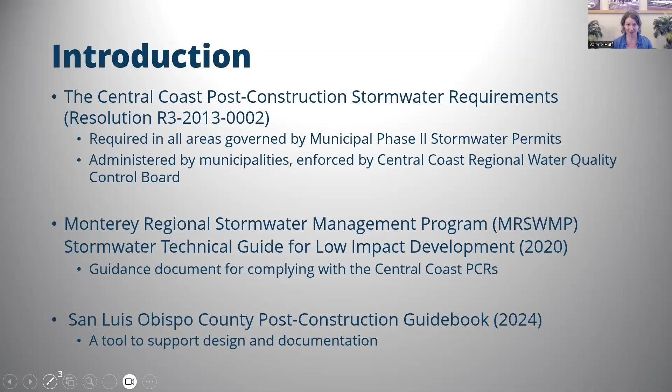Also just talking about the hierarchy of how the PCRs are implemented through our region. So the regional board developed the PCRs, but then they delegate the implementation of those PCRs to the municipalities. So it's up to the municipalities to confirm that all of the projects that are developed in their area conform to the PCRs. And so municipalities have developed varying guidebooks as a means of just helping with the implementation and giving some guidance to the development community, who is then going out and designing and constructing stormwater features.

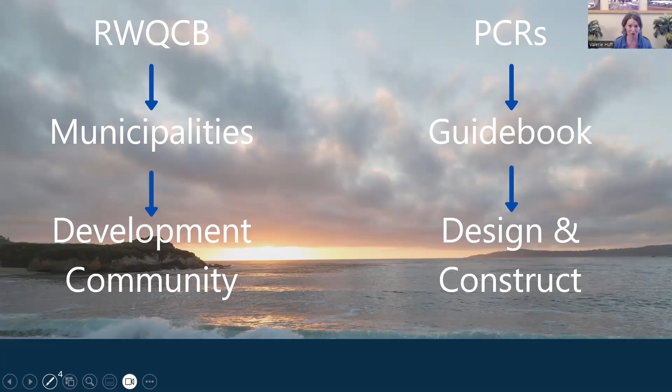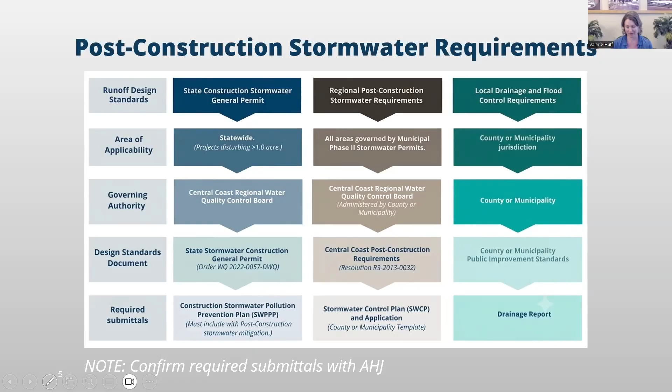Now we'll do a brief overview of the performance requirements within the post-construction requirements. There are 4 different tiers of performance requirements within the PCRs, and they are dependent on the amount of new and replaced impervious square footage you are developing on your project site. For many of you, this may be information you've worked with over the past 13 plus years of implementation, so I'll go through this briefly. If you have questions, I'll get back to them towards the end.

Tier 1 is site design runoff reduction. Tier 2 is water quality treatment. Tier 3 is retention, and Tier 4 is peak flow management.

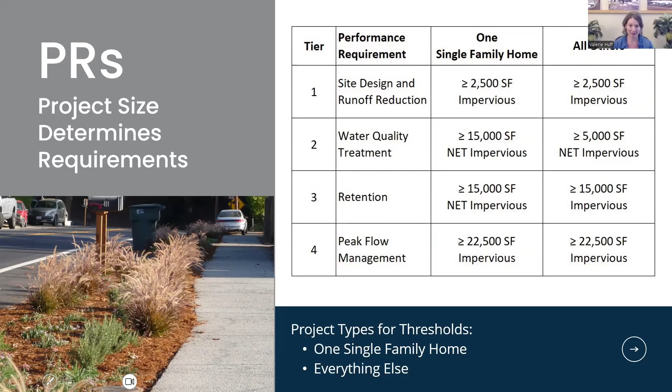For the purpose of thresholds for PCRs, where you fall in these categories, there are 2 different classifications defined in the PCRs. One is a single family home, meaning 1 single family residence, and everything else falls into the second category. The intention is that the regional board wanted to capture anything considered a common plan of development—meaning if you are constructing 3 or 4 single family homes under a single construction permit, that would fall under the everything else category, while 1 single family home is very literally 1 home.

An overview of the typical submittals for post-construction requirements—these submittals may vary depending on the complexity of your project and where you fall within the planning and permitting process. A typical project would start with a preliminary stormwater control plan, which may be where you're applying for a land use permit. Here you just need to show conceptually that you can achieve compliance on your project site.

As you move into final engineering design and construction documents, that's when you would prepare a final stormwater control plan. You may also be required to submit a drainage report and typically a geotech report to support that stormwater design. Here you would also be drafting an operations and maintenance plan, then moving into construction, where as engineer of record you have specific inspections to document that construction. Following construction, you would finalize your O&M plan based on record drawings, and then finalize a maintenance agreement for the maintenance of your stormwater control measures in perpetuity.

One thing I want to mention for this slide, and really everything I'm describing here, is that you want to confirm submittals with the specific permitting authority you're working within. So check with your municipality to confirm what they're expecting so that you are submitting what is required for your project.

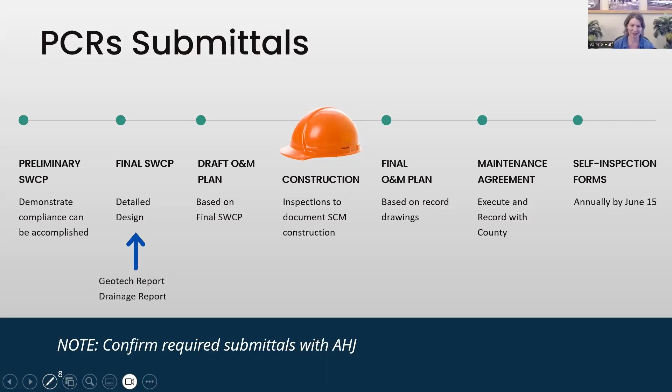Next, I'm going to walk through a few specific references in the guidebook that apply to various performance requirements. Again, these are all regulations that come directly from the PCRs. These have not changed, but the intention of the guidebook was to provide clarity and resources on how you could respond to these requirements.

One of those is source control BMPs, and the PCRs require that your stormwater control plan outline the source control BMPs for all projects that are PR2 and above. There are various types of source control BMPs—they can be structural, such as covering for a trash area, or operational, meaning street sweeping or providing training for staff.

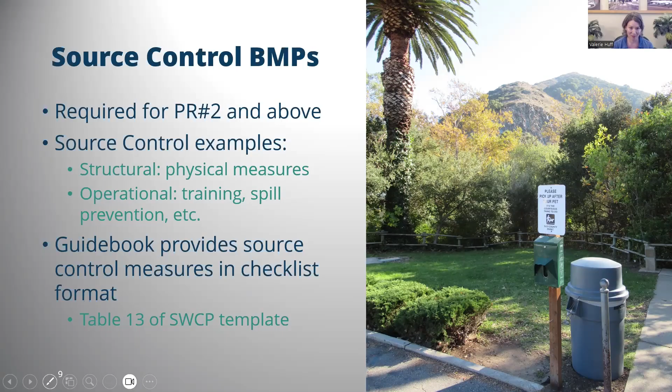What the guidebook does, and also what the MRSWMP technical guide does, is provide these source control BMPs in a checklist format. The intention is that for most projects, any of the BMPs you will need are provided in a template and a table, and then it's up to you as the applicant to go through and edit that table to confirm you're covering everything applicable to your project.

Moving on to opportunities and constraints. The PCRs explicitly require that all projects PR3 and above prepare what is called an opportunities and constraints analysis. The intention here is to look at different features and characteristics of your site and identify where you could integrate passive stormwater measures into your site design.

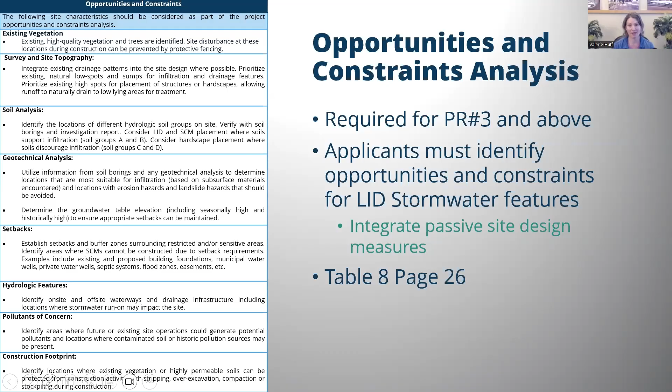The PCRs are very prescriptive in terms of what needs to be required, and this is an area where we've seen applicants provide varying levels of detail looking at all these different criteria. So what the guidebook does is streamline all of this into a single section, and it contains a checklist that includes all of the opportunities and constraints required by the PCRs. This is now integrated into the SLO County Stormwater Control Plan template.

The intention is that you're covering all the categories in a checklist format. So rather than having to develop this information for each project, you can go through and check the boxes that are applicable, and then add descriptions to better describe your project or justify why they are not applicable.

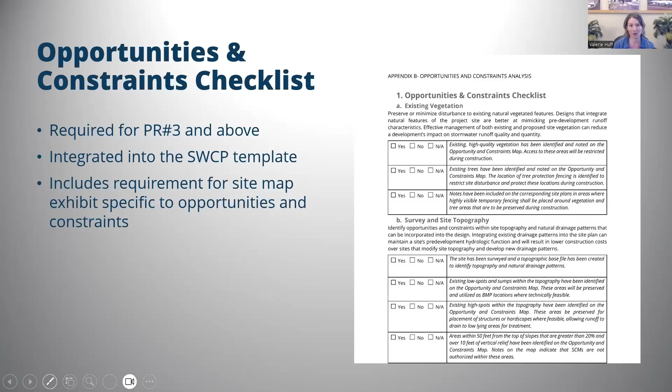The guidebook also contains guidance on drainage management areas, and this has been a bit of a gray area in terms of PCR compliance. What is exactly a DMA relative to a watershed or a subwatershed? This guidance and table in the guidebook came from guidance published by the regional board subsequent to the PCRs, and also from project experience seeing the types of projects coming through the county over the past 10 years.

One thing I haven't noted is that on each of these slides, these are little snips from the guidebook. I'm not intending that we go through each of these in detail for the sake of time, but I am identifying on the slides where you can find this information in the guidebook. The intention is to plant the seed that this is a reference you can go back to and find this information in more detail if it's applicable to your project.

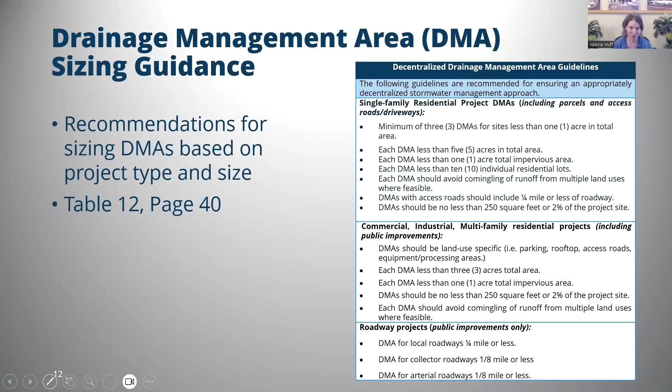Wrapping up the performance requirements, a reminder that if you have local flood control requirements that apply to your project, you typically will need to prepare a separate drainage report. Often what we see is a drainage report combined with a stormwater control plan, and in that case it can be really challenging for the municipality to confirm that you've met all the requirements of the PCRs.

A reminder that the regional board implemented delegated implementation of the PCRs to the municipalities, and it's up to them to confirm that you have met all of these requirements. So for the sake of showing compliance with PCRs, it's more straightforward if you can break out flood control into a separate drainage report, and often that is what will be required by the permitting agency.

So for PR3 and above, PR4 and above, typically what you need to do is document compliance with PR4, which is the 2 through 10-year storm, in your stormwater control plan. Then if you need to manage, say, the 25, 50, or 100-year storm, that would be documented in a separate drainage report.

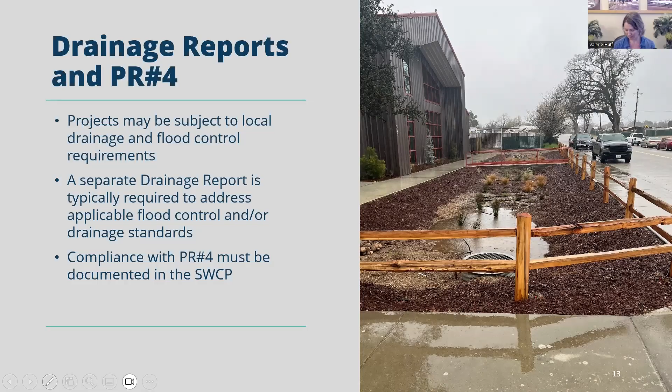Now we're going to jump into discussion of pervious surfaces and runoff coefficients. From my perspective as a designer, this has been one of the more challenging aspects of compliance with the PCRs. What is in the PCRs is an equation to calculate what's called a runoff coefficient, and this is different than other coefficients we'd use in hydrology, such as a rational C or a curve number. This runoff coefficient is specific for small storms and is based on the percent impervious of your project site.

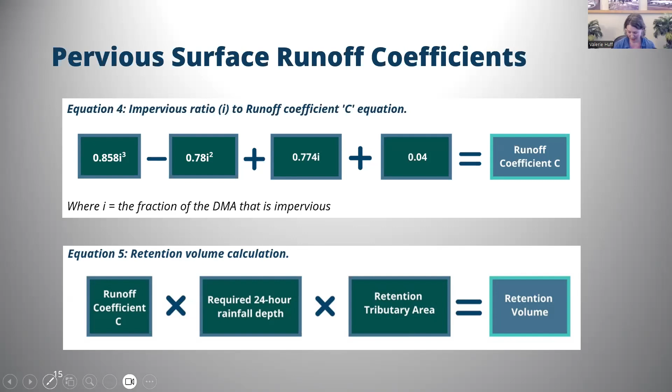It's a fairly straightforward equation. What becomes more challenging is understanding what is considered impervious and what is not, and if you have a surface that is maybe semi-pervious, not a lawn but not a parking lot, what is it? This runoff coefficient C is then used to calculate your retention volume, so it's a direct input to how you will comply with PR2 or PR3. What the guidebook now includes is recommendations for C values, runoff coefficient values, for commonly used surfaces.

The intention is that in lieu of calculating a C value based on percent impervious for these types of surfaces, you can use this C value directly from the table. This table was prepared to clarify what the County of San Luis Obispo specifically identifies as impervious surfaces, and what they would expect a reasonable coefficient to be for something semi-pervious, such as a DG walkway.

There's a couple sections I want to point out in this table, specifically a big change currently within San Luis Obispo County: Class 2 ag base is now considered an impervious surface. This is based on direct feedback from the regional board as they reviewed this guidebook, and also on the direction the State Water Board is taking statewide in classifying gravel surfaces.

So this classification applies to any type of gravel surface that is dense graded. From a stormwater perspective, we are breaking out two general types of rock: dense graded versus open graded. Dense graded means you have a wide range of rock sizes within your mix, so when compacting that gravel, the smaller rocks fill in the voids and you end up with a fairly dense structural section with a low void ratio.

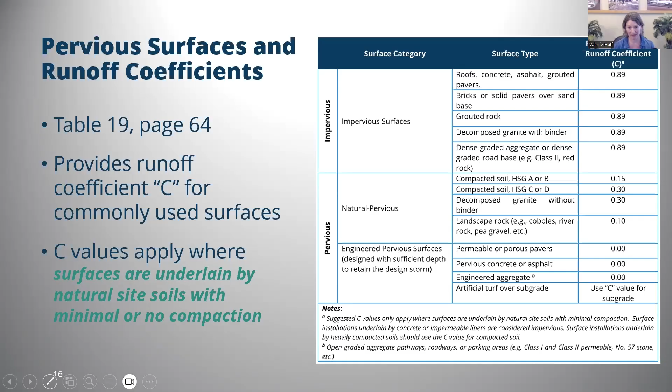Looking more closely at the table, there's a category we've classified as engineered pervious surfaces. The intention here is that these surfaces are designed specifically to retain your storm, whether that be the 85th or 95th percentile storm. These surfaces have a corresponding runoff coefficient of 0, meaning for those design storms you would expect 0 runoff. The important thing to understand is that if your rainfall depth, say, is 2 inches, you have enough pore space within that depth of aggregate to hold that 2 inches of rain.

Another challenging factor I wanted to point out is that the PCRs contain a table of correction factors, which I believe are in Attachment E. They're in the SLO County Guidebook in Table 11. These correction factors are meant to be used for alternative compliance only. They are not intended for use in calculating runoff volumes.

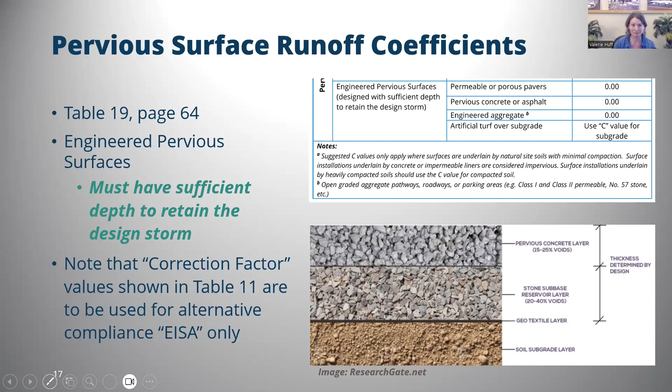I also wanted to point out that in San Luis Obispo County specifically, with these surfaces—dense graded aggregate, decomposed granite with a binder—counting as impervious surfaces for the runoff coefficient, they also now count towards the impervious surface for your PR threshold. So if you have a long Class 2 base driveway, that could now push you into a higher PR threshold.

Of importance, again, this is specific to SLO County—check with your local jurisdiction to see how they are categorizing gravel. If you have an existing Class 2 driveway or other parking area on your project, that's now considered an existing impervious surface. So it's categorized as impervious for both existing and proposed conditions.

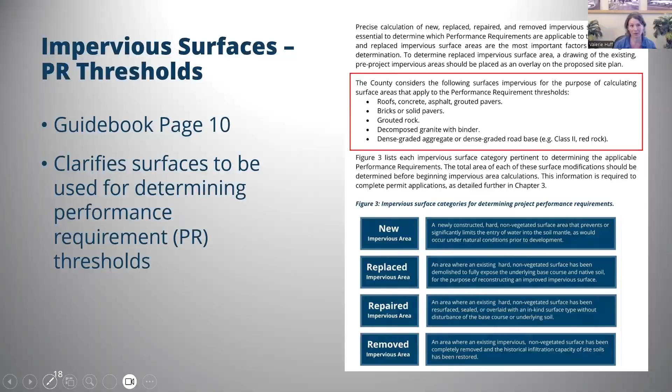Next, we're going to jump into a description of some common stormwater control measures. One of the primary things Anne really wanted to do in the guidebook was provide clarity on stormwater control measure types, because through the past 10 plus years of implementation, we've seen a lot of varying nomenclature in how stormwater control measures are described.

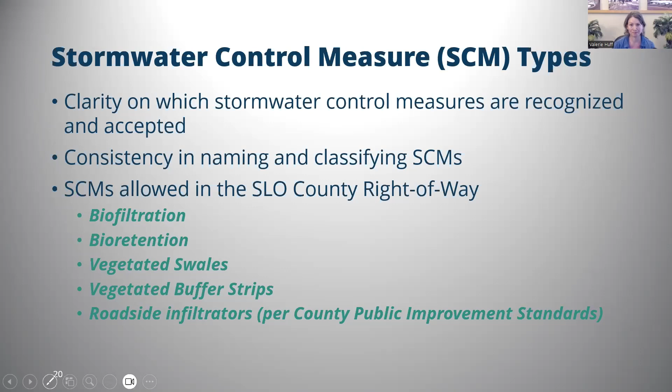What the guidebook does is provide a detailed table of really every single type of stormwater control measure that hopefully you would need to include within your project. There may be very specialized cases where something doesn't fit within these categories, but the intention is that these categories are specific, but broad enough to capture generally all types of stormwater control measures. So there's a very specific name, and the intention is if you're designing one of these features, you're using the name that's shown in the table.

There's a description of what these features would include, and there's also a column that shows which performance requirements are applicable for different types of stormwater measures. The intention is that anybody plan checking your stormwater control plan or construction documents can see this nomenclature on your plans and in your report and confirm the type of facility that it is, and also the type of operations and maintenance that will be required.

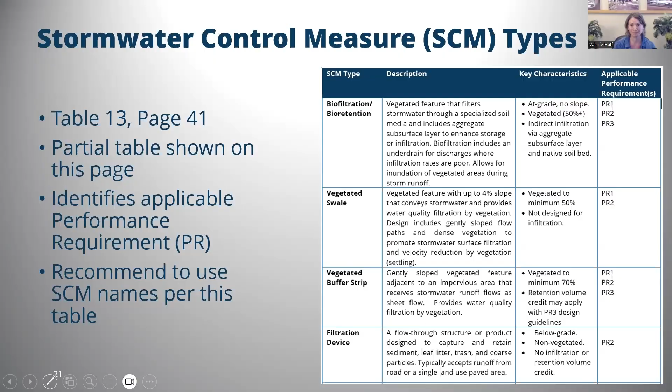This is just an example of two constructed stormwater control measures in our county that had varying names assigned to them that maybe weren't very clear in terms of their intention. We've seen kind of a mishmash of names, like a bioretention swale or maybe a bio basin, whereas the intention with the naming is that it will be consistent with what you see in the built environment. So visually, you can expect what the facility might look like based on the name.

That also clarifies the long-term operations and maintenance requirements, so that if a county inspector or the engineer needs to do a follow-up, they can look at the name of the feature and know: yes, this is a bioretention basin, it should have a flat bottom, it should have these other features, and these are the things you need to do to maintain it. So the intention is not just to facilitate plan review and permitting, but also to carry these projects through that O&M phase in perpetuity.

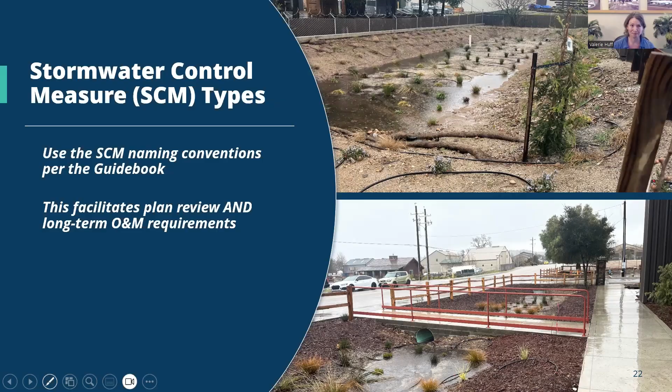Again, these are recommended minimum requirements. There may be specific reasons why on your project site you would want to have a larger setback, or you may be requesting a variation. These setbacks are required in San Luis Obispo County; they may vary within other regions. There's two types of stormwater control measures that I'm going to speak to very specifically, and the first are vegetated swales.

I'm bringing up swales because what we've seen in implementation is that oftentimes designers try to use swales as double duty with bioretention. What's been done in the past is that bioretention media has been used in the flow line of a swale. A swale by nature is designed to convey runoff, taking it from one part of your site to another, and that runoff is concentrated, meaning it's all within the shape of your swale—whether it's a V swale or a trapezoid, it's all within the footprint of your swale, and it's concentrated flow. Bioretention media was not intended for use in that type of facility because it's highly susceptible to erosion.

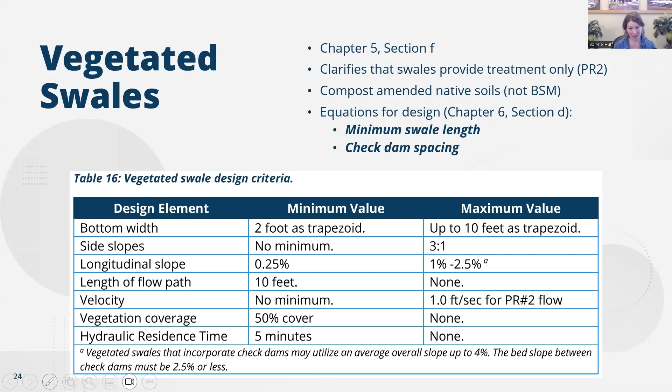Here are some graphics of swales around the county. Of note is that swales, in order to provide treatment, require a minimum coverage of 50% vegetation. It's the contact time with vegetation that provides treatment as water flows through these swales, so as a designer it's something to consider. It looks like the swale on the top left needed closer plant spacing to achieve that 50%. Cobbles can certainly be used within the flow line of a swale, but you need to be creative with planting around those cobbles so you're achieving that 50% vegetated coverage. Again, what defines a swale is that it's treating and conveying concentrated runoff.

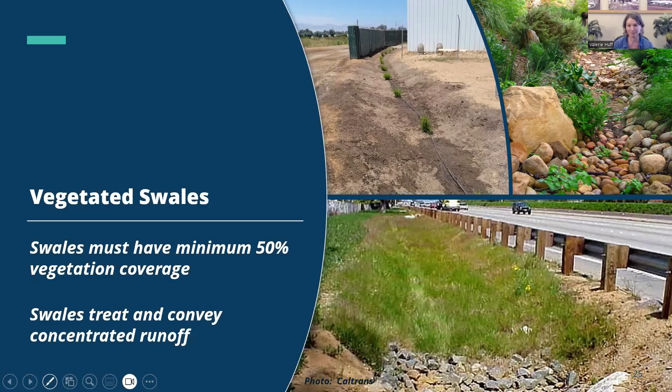The second type of feature I'm talking about is similar to a swale but performs very differently — this is a vegetated buffer strip. A vegetated buffer strip is literally a strip of vegetation adjacent to an impervious surface that collects only sheet flow and conveys only sheet flow runoff. The typical use is adjacent to roadways, driveways, and parking lots. The top right image from Caltrans shows how a vegetated buffer strip, in this case labeled as a vegetated slope, can be used in combination with a swale or channel.

The intention is that runoff from the roadway flows through this vegetation. It's a very short length compared to a swale, but because it's sheet flow, it's also very shallow and slow moving, so you can achieve the necessary treatment in a short distance, in most cases 10 feet. So you could have a 10-foot buffer strip adjacent to your roadway that's then conveyed to a swale — maybe a vegetated swale, or maybe it needs to be a concrete V-ditch or concrete lined channel. Now you don't have to count on the channel to provide treatment, and you've achieved treatment in a manner that's relatively easy to maintain for your roads crew. These types of facilities you can mow and go — they don't require specific types of vegetation.

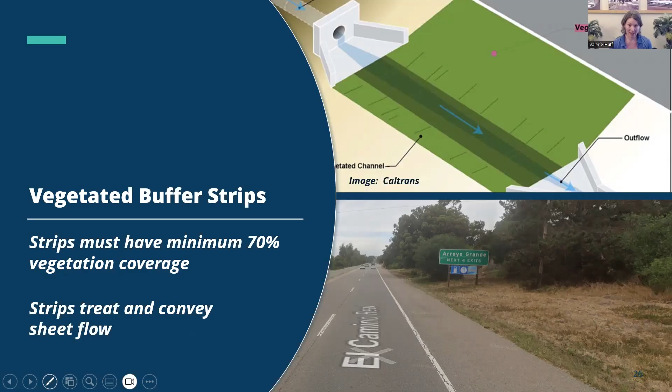I'll move on to the following slide, which shows the typical design criteria for a vegetated buffer strip. That 70% cover came from field studies completed by Caltrans identifying how these buffer strips were infiltrating and treating water for a variety of soil types. The guidebook has taken this Caltrans criteria and applied it directly to storms required for PCR compliance, providing direct design criteria for the length and maximum slope of your buffer strip to achieve compliance for both PR2 and PR3. I personally think this is a really valuable tool for post-construction compliance for roadways, especially given that Class 2 base is now considered an impervious surface. It was really an important factor for the county to include this in the guidebook, to help provide ways of compliance for rural roads or other roads that may be constructed with a dense aggregate like Class 2.

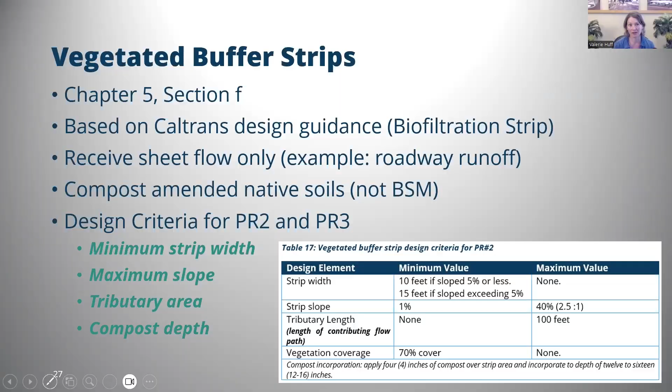Moving on from surface-based stormwater control measures, the guidebook does include specific criteria for subsurface stormwater control measures, all captured in Chapter 5. Subsurface stormwater control measures can include proprietary systems such as chambers. In SLO County, there's also a standard detail in the public improvement drawings for what's called a roadside infiltrator, and this would also apply to a dry well, whether proprietary or custom designed.

Some important things to know about subsurface stormwater control measures: for any project PR3 and above, you need to prepare the opportunities and constraints checklist we talked about. Specifically in SLO County, you need to justify why you cannot achieve your PCR compliance at grade and why you need to use a subsurface SCM on your project site. Of note, the Monterey, the MRSWMP technical guide specifically requires a permanent pre-treatment upstream of any subsurface stormwater control measure, with the exception of an underground facility constructed for a single family home.

Within SLO County specifically, the guidebook requires that a certain amount of your PCR compliance be achieved at grade, meaning you can't do everything below ground. So there's a percentage of your volume — in SLO County it's 30% of your runoff volume that has to be managed at grade on your project. That doesn't necessarily have to be the same water that flows into your underground chamber, but it needs to be DMA'd somewhere on your project site, basically showing that you're putting good faith effort into trying to achieve compliance with surface, preferably vegetated, type facilities.

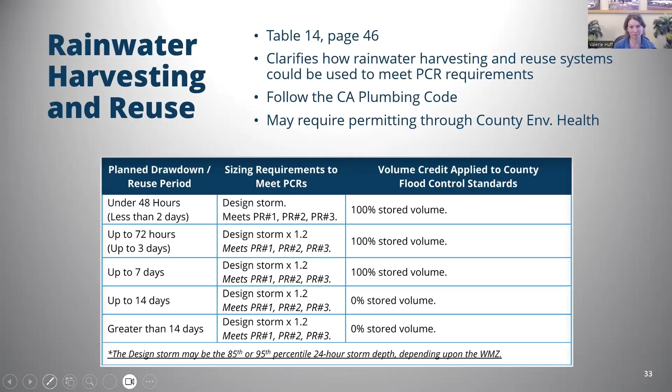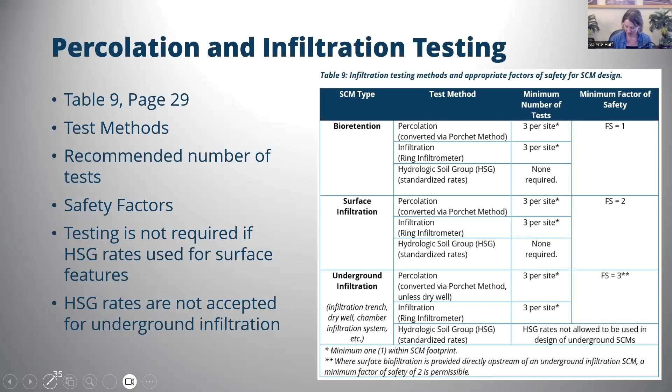I'm going to talk briefly about the difference between percolation and infiltration. Infiltration is the movement of water into the soil profile. Imagine you have a puddle on the ground and it's absorbing into the soil - that's infiltration. Once that water is in the ground and it's moving through the soil profile, that's percolation.

The typical test that we use, and what's actually posted on the regional board website, is a percolation type test. This water is already in the ground, and for the most part it's moving horizontally through the soil profile. In general, for most soil types, water moves faster horizontally than it would vertically, with the exception of maybe dune sand, where you could expect that water moves really quickly.

With the percolation type test, you typically are using a borehole, which is deep, and most of the water movement is through the sidewall. So you have a significant area of sidewall compared to the small diameter hole, which represents the base of your facility. The percolation test is primarily measuring only that horizontal movement through the soil.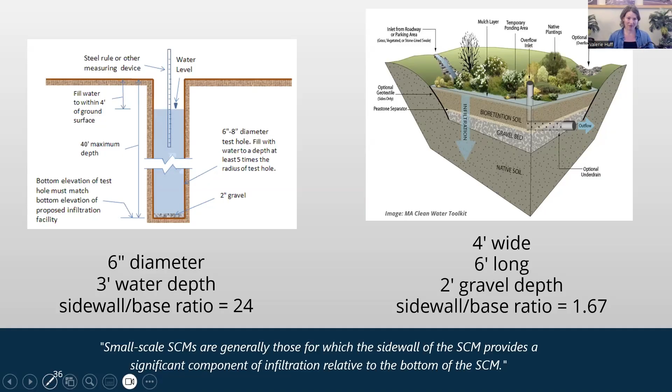For this reason, the guidebook requires that you use a conversion factor referred to as the Porchet method. What the Porchet method does is it takes the geometry of your borehole and categorizes what is horizontal movement versus vertical movement, and applies a reduction factor to your test results, specifically when you're using percolation type testing.

In general, this equation should be applied uniformly to all different stormwater control measure types, with the exception of a dry well, because a dry well very closely mimics the setup of a percolation test. If you've designed another facility with a significant sidewall component, it may be acceptable to use your percolation type testing directly. There's some flexibility for the designer, but in general it's recommended to use the Porchet method to account for that difference.

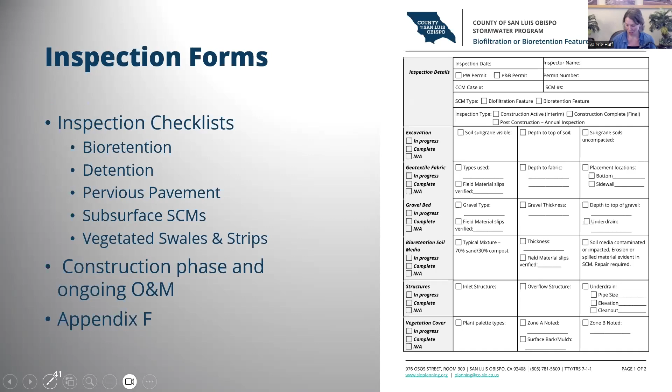So there's a full list of SCMs included for inspection checklists. These were prepared such that they could be used for both the construction phase, where typically the engineer of record has to certify the inspection, or for ongoing operations and maintenance.

There's also a group of O&M forms. I'm not going into these in detail, but of note is that in San Luis Obispo County, these O&M forms are used as the maintenance plan. The county saw varying levels and degrees of material included in maintenance plans, sometimes completely duplicative of the stormwater control plan. So the county has consolidated all the O&M requirements into these forms. The intention is applicants will fill out the forms and include any necessary attachments, and that is the O&M plan.

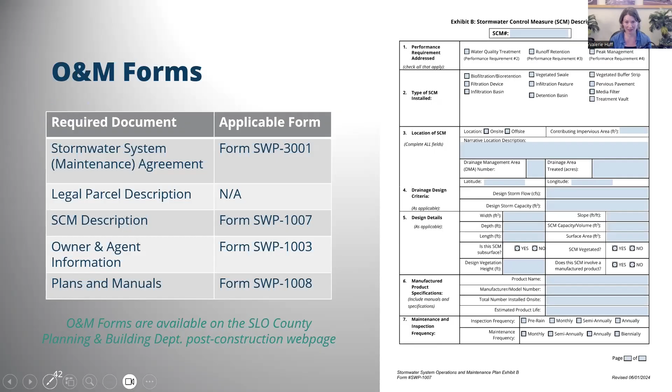The guidebook also includes various plant tables and plant lists, and these are a reference meant to be used directly on your plan sheets. So if you're designing, say, a bioretention facility, you can go to a plant palette intended for either a coastal environment or a more inland environment. Then there's a category for residential and commercial, and you can pick a table and copy and paste this directly onto your plan sheet.

The intention here was to try to highlight plants that we've seen have good survivorship within SLO County in the Central Coast region, and really just promote the fact that you don't necessarily need an expensive or detailed landscape design. You can use these plants as a starting point.

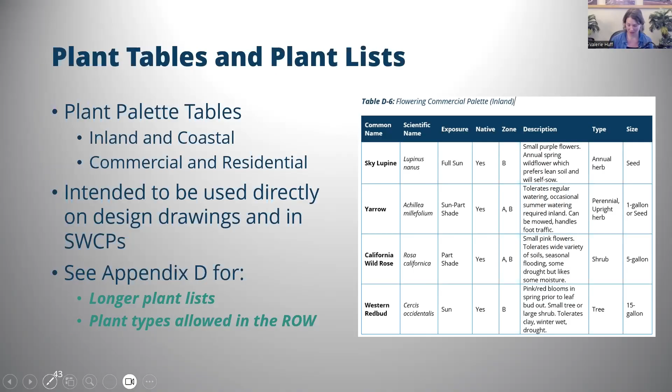And then lastly, I'll just touch on the fact that there are example projects included in the appendix of the guidebook. So there's two projects. I believe one is residential, one is commercial, and they are a comprehensive example of everything that would need to be submitted in San Luis Obispo County. They include all the exhibits, all the supporting calculations, and the O&M forms. The intention is that if this is new to you, or if you have questions on what is expected, you can go through these example projects and hopefully glean some information on how this would apply to your own project.

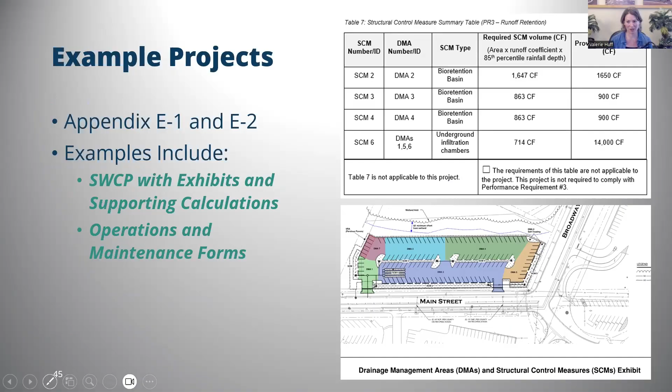So with that, I am going to start jumping into Q&A.

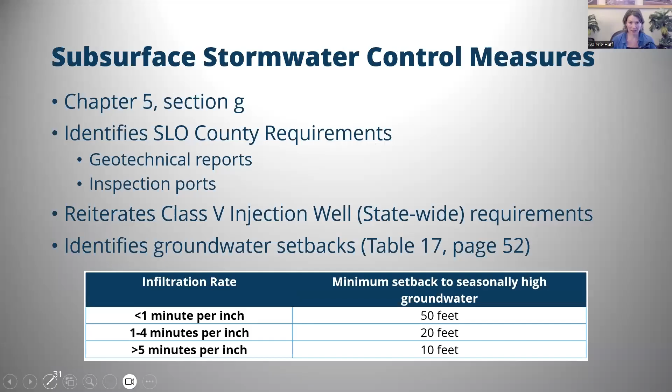Yeah, that is a really good question. I'll say that I have seen varying requirements in different municipalities. So this is one that I'll answer based on my experience, but you really need to check with the municipality that you're working within. So all chambers require pre-treatment, absolutely. Some municipalities will allow that pre-treatment to also occur underground.

For example, a CDS unit, or some of the proprietary systems have an initial chamber that's wrapped in filter fabric. Some municipalities allow that, some do not. In SLO County specifically, they will allow subsurface treatment ahead of the chamber, but you do have to meet this other criteria shown on the slide, where you have to have at least 30% of your PR2 volume treated somewhere else at grade on your project site. So in SLO County, the answer is both.

In other municipalities, again, check to confirm that you can achieve PR2 with a pre-treatment chamber that's maybe part of your larger chamber system. I'll say there is an effort by the regional board currently to start taking feedback on the post-construction requirements to prep for potential future revisions. One of the things I have heard through those meetings is that the regional board is thinking about requiring that treatment occur at the ground surface, not in an underground chamber. So that's potentially a future change.

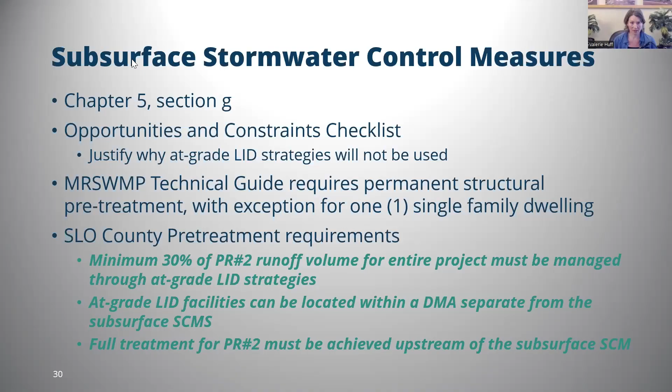Just one example, I have spent time during rain storms driving around and seeing how facilities are performing. What I have observed is that in similar areas of our county, in very similar soil types, basins that are vegetated are draining, and basins that are not vegetated are not draining. Vegetation helps loosen up the soil profile, there's interaction between the roots and the water. So if you can use that double ring infiltrometer on a surface that's vegetated, I think that's going to better represent performance.

All that said, the standardized rates, the hydrologic soil group rates within the technical guide, within the SLO County Guidebook, are based on testing of bioretention features that occurred up in the Bay Area over a number of years. So I, as a designer, really think those values represent most of the conditions we'll see. If you're trying to justify something well outside the range of those values, maybe that's when you'd see the benefit of doing more detailed testing. But if you're designing a bioretention feature, I would recommend using the hydrologic soil group rate because I think it's going to be the most representative of long-term performance.

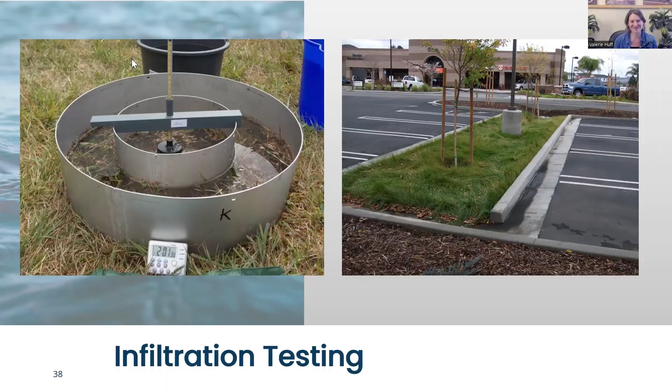Our next question is, can you put the SCM setback slide back on screen? And the subsequent question is, are structure and foundation and vehicular area setbacks noted?

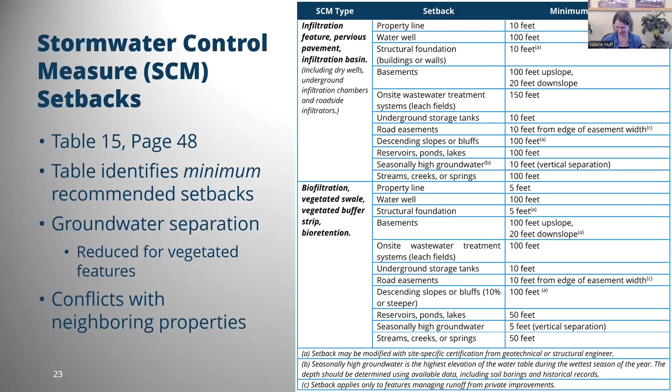Well, Valerie, your thorough presentation seems to have minimized the amount of questions we've got. So we are so grateful for your presentation today, and thank you so much, folks who joined us. We really appreciate having you be a part of this. Yes, thank you so much for the opportunity.